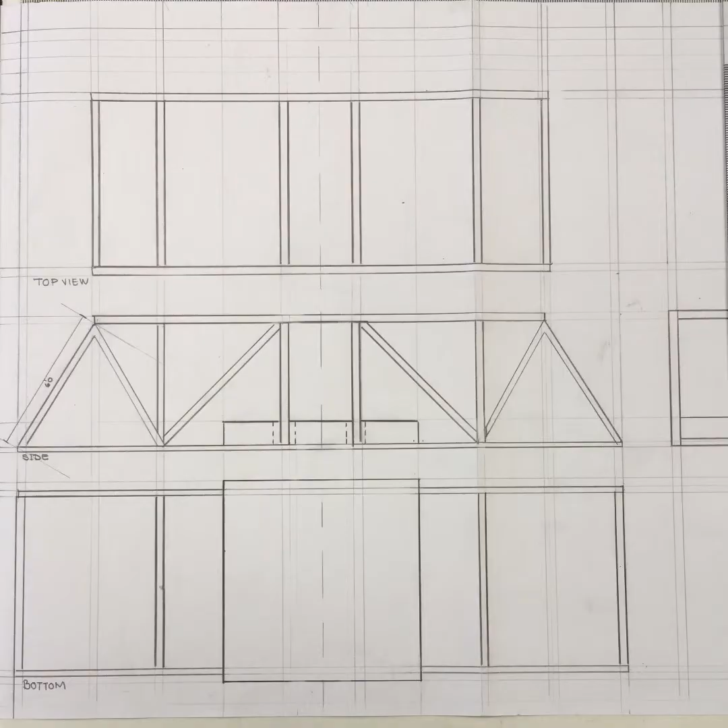Once you finish drawing the components, you need to add measurement lines and measurements using specific protocols. Measurement lines are always on a guideline and between two other guidelines. The start and the end of the measurement line is clearly marked, and a measurement line is darker than a guideline.

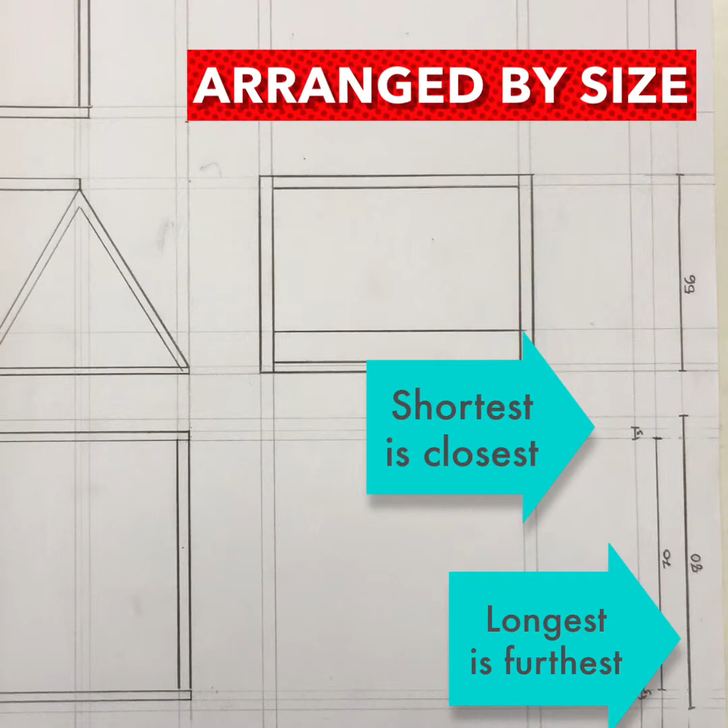We organize measurement lines according to their length. The longest measurement lines will be the closest to the side of your paper and the furthest away from the object. The shortest lines are the closest to the object. Measurement lines should be outside of your drawing space. In other words, they should not be on top of where you have drawn objects. They should be at the edges of your paper.

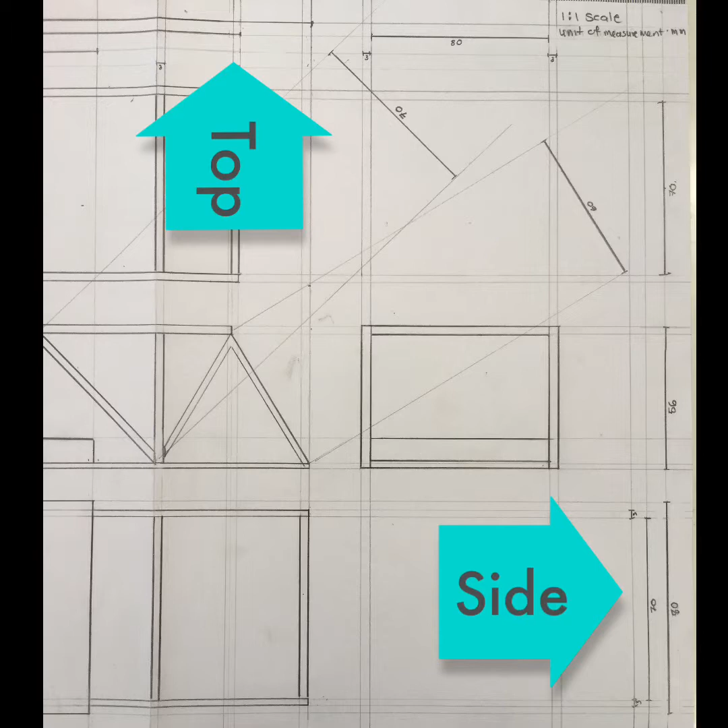You should have measurement lines on at least two sides of your page, at the top or the bottom of your page, and at one of the sides of your page. Diagonal lines should be described as well. Let me explain to you how to do this. You will need to use a tri-square. It has a 90-degree corner, and you are going to need to use this to make sure your guidelines are very accurate.

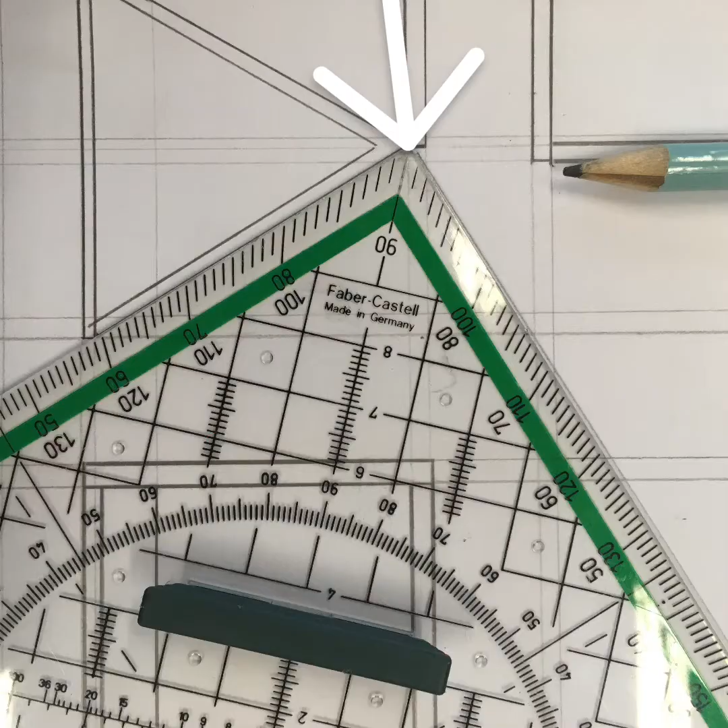Line the component edge up exactly to the 90-degree corner of your tri-square. The tri-square should be lined up totally flat against the edge of the component that you are measuring. Draw a guideline away from your object towards the side of the page using a light line. Turn the tri-square around and line up the 90-degree corner with the other side of your component. Also draw a guideline to the side of your paper from here.

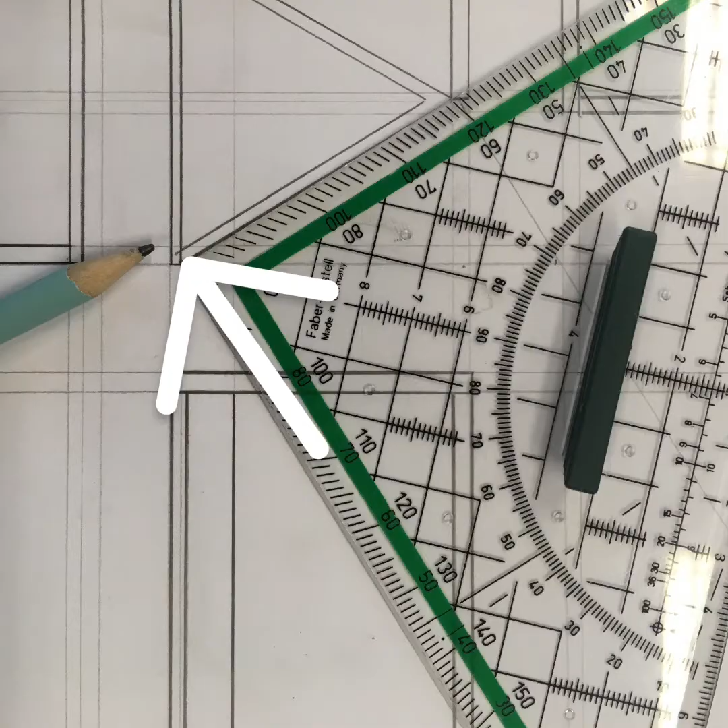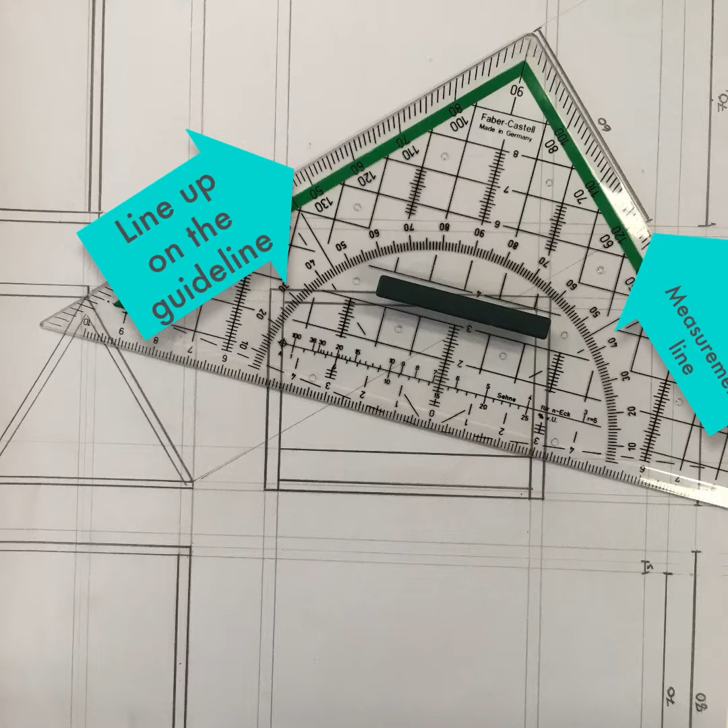The two measurement lines must be parallel to each other. The object edge and the measurement line should be parallel to each other as well. That's what it should look like. Repeat the process for all of your different diagonal components. Every component needs to be measured.

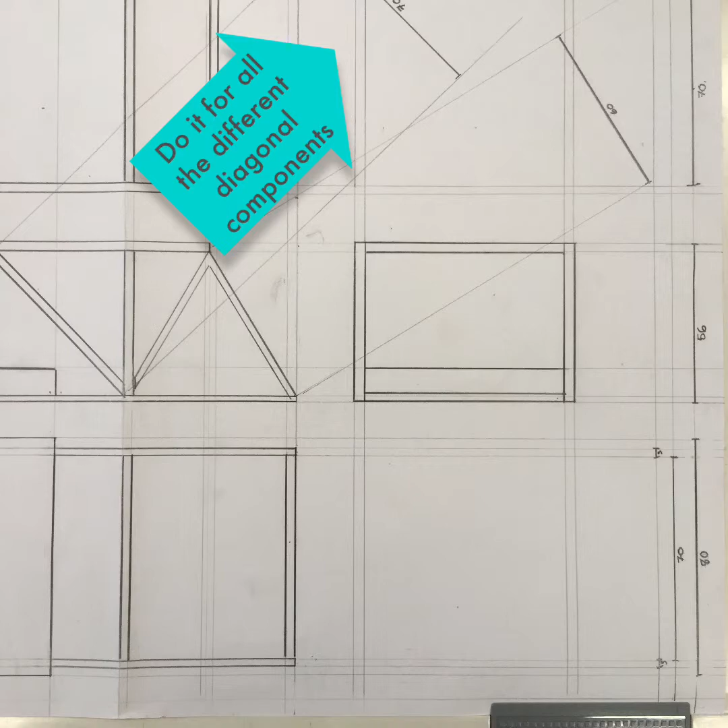Guidelines should be lighter than measurement lines and the outlines of your object. The object lines are the darkest lines because they have to show all of the components very clearly. Measurement lines start and end on guidelines, and this is clearly marked. The measurement is centered beneath the measurement line. This means it should be drawn in the middle underneath all of the lines.

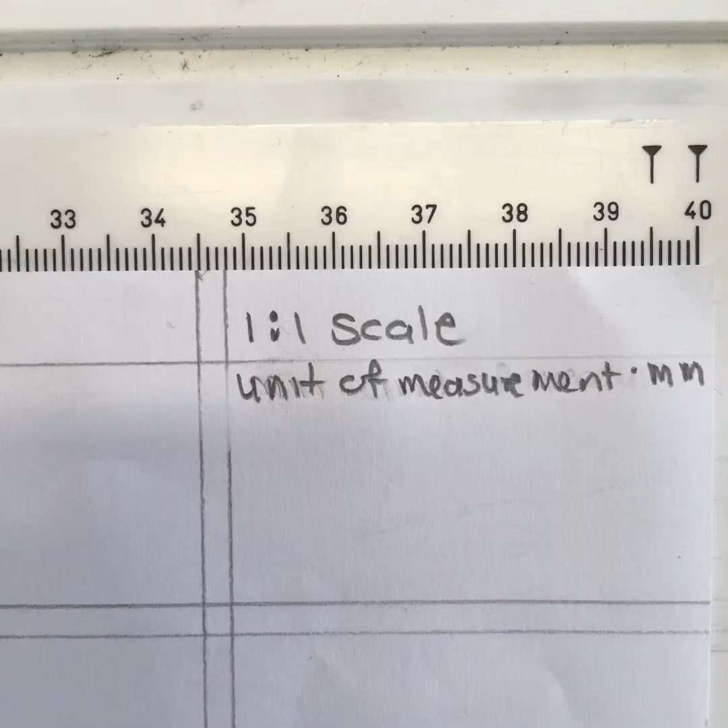You should describe the measurement unit for any orthographic drawing. We are using millimeters for our bridge drawing. You will normally see this and the scale in the top corner of your page. The scale of the drawing tells us how big the object will be. We use 1:1 because our object will be exactly the same size as our drawing.